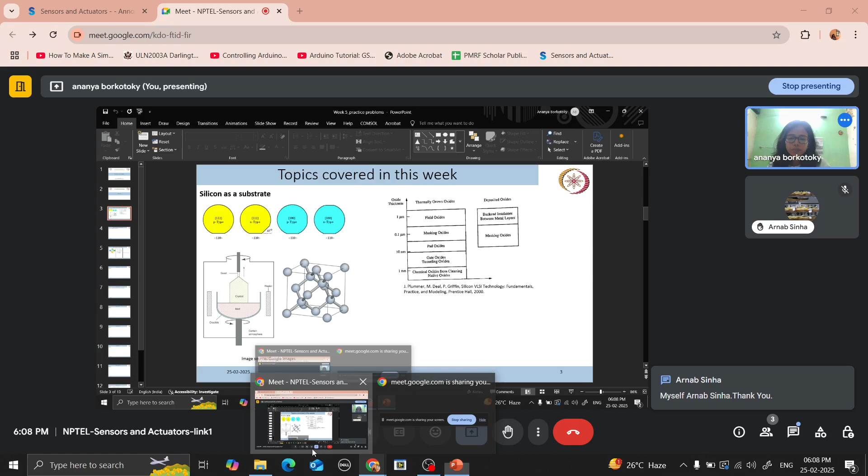The first topic discussed this week is about silicon and silicon as a substrate. In this course we are mostly talking about different sensors which are MEMS based, and many of these use silicon substrate.

We already know how to pattern silicon very easily, like what materials can be used for etching of silicon or silicon dioxide. So all these things are already well known.

Also, bulk micromachining and surface micromachining techniques on silicon substrate are well known. The processes have been developed, so it is easy to work with silicon substrate, and that is why we are mostly focusing on silicon. But for some specific applications, there may be a requirement for other substrates as well.

Suppose you know silicon is not transparent. If you want to use a transparent substrate, then glass can be an option. And if you want some flexible substrate, then PDMS or any other flexible substrate can be an option.

That depends on the application and the type of sensor that you are designing, so we will talk about silicon here. Now you know there are different types of silicon substrates available for us: 111 p-type silicon, 111 n-type silicon, 100 p-type silicon, and 100 n-type silicon.

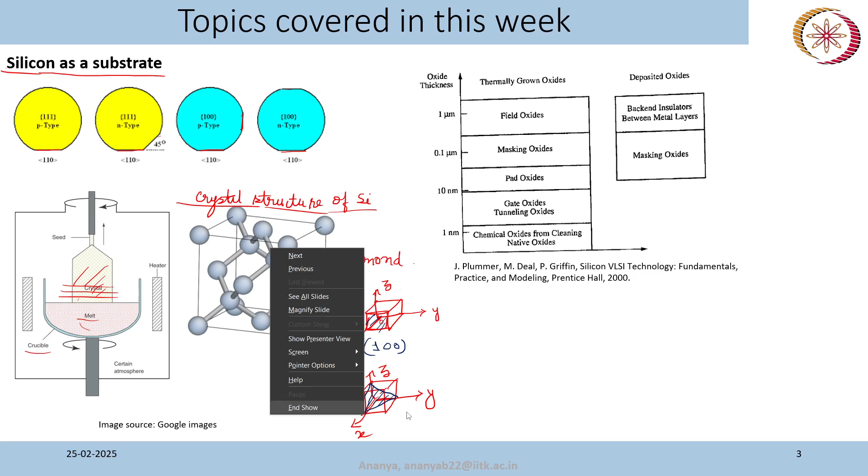Okay, so my diagram is not very clear, but you can see that this is our 111 plane. This plane cuts the x-axis at 100, y-axis at 010, and z-axis at 001. That is why this is the 111 plane.

Now if you look at the silicon crystal structure, this is the 100 plane, and the 111 plane will be this. You can see that the atomic density in these planes is different.

That is why if you have a 100 silicon wafer, it will be less reactive to some surface phenomenon. It will be less responsive in a surface phenomenon compared to 111 silicon, because of the more atomic density for surface reaction, the reactivity will be more.

So based on that, you can determine what kind of silicon wafer you want to use for your application. If it involves some surface phenomenon and you want this surface activity to happen, then you'll probably go for the 111 silicon wafer. And mostly in CMOS devices, the 100 silicon wafer is preferred.

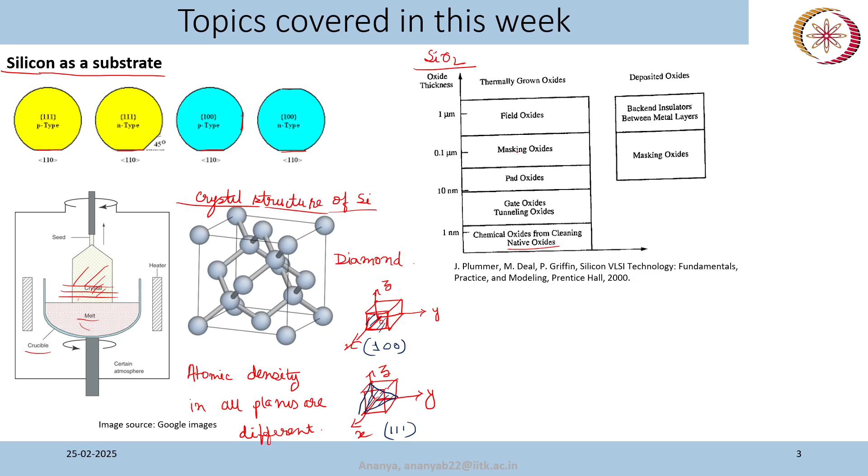Masking is like, say you are doing bulk micromachining of silicon. So this is your silicon, and you have patterned your SiO2 like this, and you are using it as a mask here. Now you can do micromachining here, or if you have a silicon wafer and you have made an opening like this using SiO2, then you can go for doping here. Basically it is used as a mask, like a covering for the silicon below it.

Okay, so we often use silicon dioxide for this purpose, and we call it a pad oxide because silicon dioxide is amorphous in nature. So many times, instead of getting strain and stress from any other processes, we use an SiO2 layer as a pad oxide, so that no stress and strain is created because of any kind of harsh treatment. And if it is very thick, then it is a field oxide.

You must have studied about field oxide if you are from an electronics and communication background, maybe in any CMOS courses. So you can see that SiO2 has many applications, and in this course we have already discussed how we can use SiO2 as a kind of masking layer.

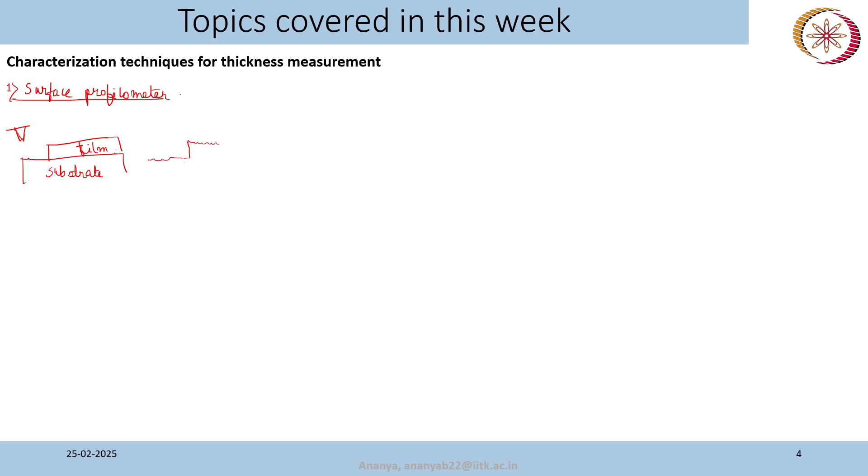At this point it will see a certain reference thickness, then there will be a jump here, and there will be some other thickness. The surface may not be very smooth, even if the roughness is in nanometer scale. If you use a very good system, it will pick up some of the surface roughness information as well.

From this result, you can take a reference here and the average value of this reference will be your thickness of the film.

What we normally do for measurement is not make just one step, but multiple steps. If I give you the top view of your film, there will be multiple steps, like this.

Now, how can you make this kind of step? Whatever deposition technique you are using will give you a uniform thickness, right? But you can put some tape or something similar to cover this area, and later remove the tape to make this kind of a step.

The good idea is to do lithography to make the step. There will be a photoresist, and then you can remove the photoresist instead of a tape, which gives a very good interface; otherwise it will be very noisy data.

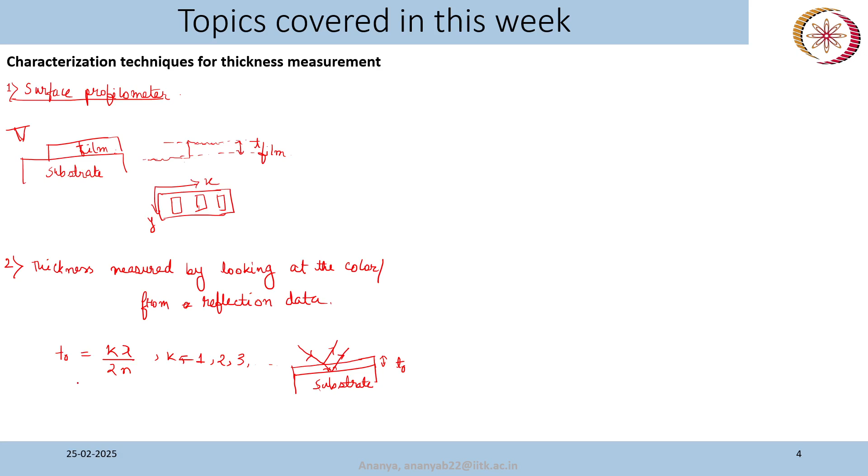Now the condition for constructive interference is: T naught is equal to k lambda by twice n, where k can be 1, 2, 3 — this is like the order. This equation was given in the class and discussed also. So this is the condition to have constructive interference.

And this condition is when the incident angle is 0 degree. So if I consider this incident angle as theta, if it is 0 degree, then this is the condition for constructive interference.

Okay, now you can directly use this equation to calculate what is the thickness of your thin film. Now practically how we will do this: if you have reflection data of a thin film...

There will be certain reflection maxima and certain reflection minima. So this is one reflection maxima and this is another reflection maxima, say at lambda 1 and lambda 2. You can see what this condition is. So suppose this is for k1 and this is for k2, so k2 minus k1 is equal to 1.

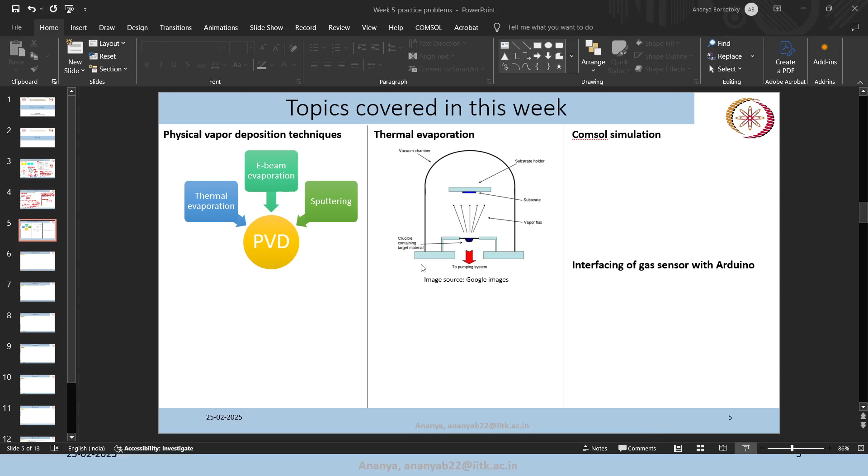So if there is any question you can ask. I'm taking a pause. Next I will go to the questions.

So, I'm asking the two of you, are you working on designing a sensor? In what area are you working? Like simulation of a sensor, or actually making a sensor, or working on interfacing a sensor with some circuit, or maybe you are taking this course just because you are working in fabrication.

Gas sensors, yeah, I did work on gas sensors in my masters. That was my MTech thesis. I also worked on fabrication of a sensor for sulfur dioxide sensing. Okay, thank you. Okay, I'll go to the questions now.

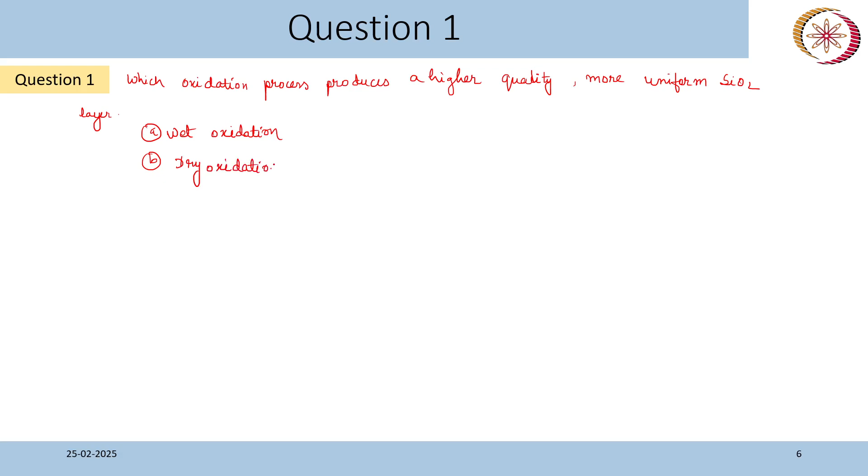So you can tell me the answer. And you can also think about why a certain technique gives us higher quality and a more uniform layer compared to other techniques. The comparison between different techniques is also important. As I've mentioned many times, there are often certain trade-offs. One thing will be good in one process, and another thing will be good in another process.

Someone is on unmute.

Thermal, the option is thermal evaporation. But we don't go for thermal evaporation of SiO2. Thermal, like any other process, involves high temperature.

So we normally grow the SiO2 layer. There are two terms: growth and deposition. Deposition is when we have a target material and a substrate, so evaporation is a deposition technique. Wet oxidation or dry oxidation is basically growth. We use the silicon substrate and grow SiO2 on top of it, so a certain portion of silicon is also consumed during the growth.

So we mostly grow SiO2 on silicon. We can deposit SiO2 using sputtering or PECVD or other deposition techniques. But on silicon we normally go for oxidation, either dry or wet oxidation. Now among these two, which one gives us a higher quality and more uniform SiO2 layer? That is the question.

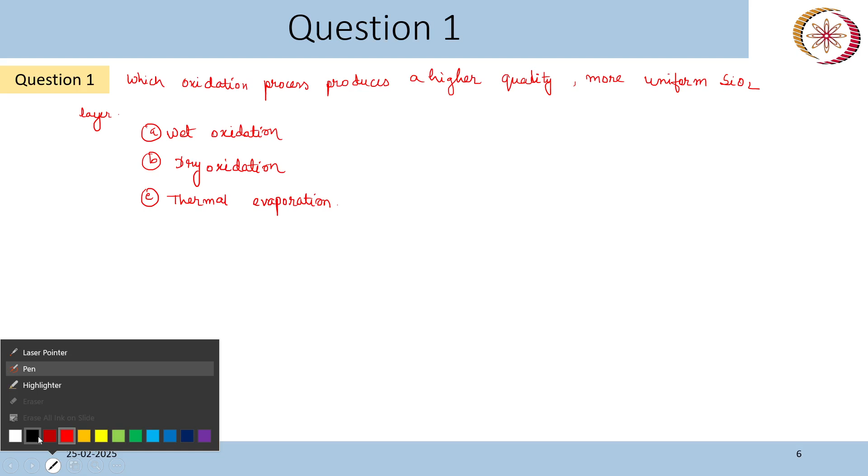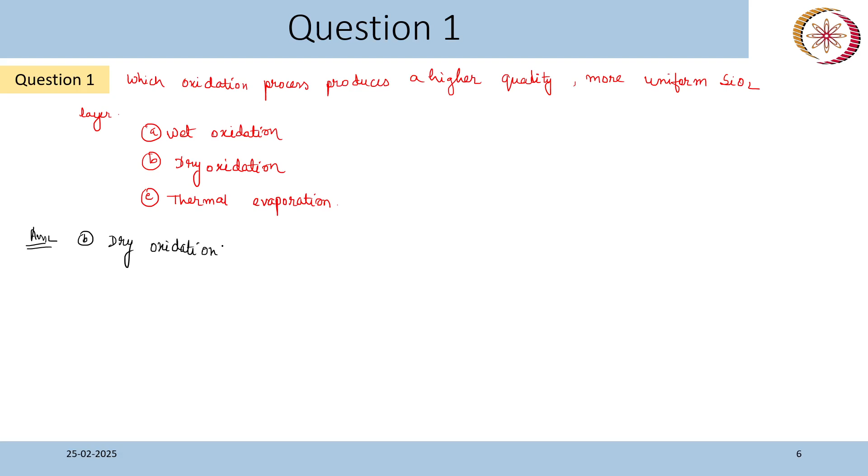So what happens in SiO2 growth, not deposition? You start with a silicon wafer, then elevate it and do the oxidation process at high temperature. The oxidation process will also depend on the temperature. You can either go for wet oxidation or dry oxidation. Wet oxidation means using water vapor, so there is also oxidant or oxygen that will react with silicon and form SiO2. Dry oxidation directly uses oxygen gas.

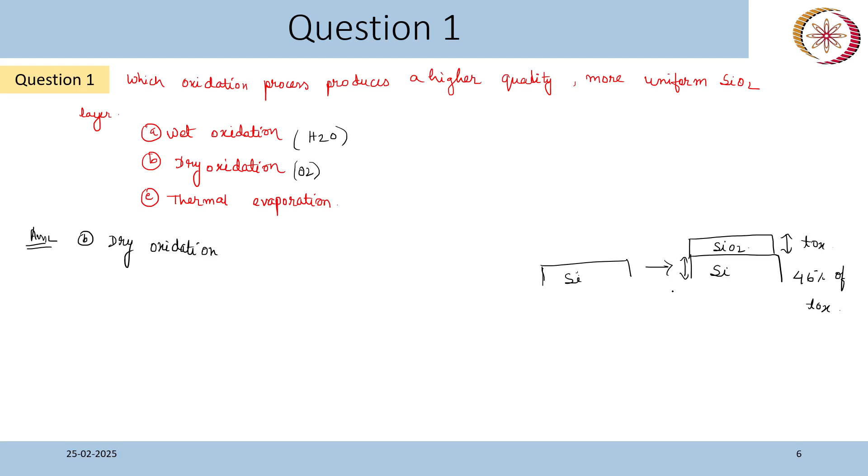So this is the difference between growth and deposition, just wanted to discuss that. In deposition, a material is deposited on silicon and there is no change to the substrate.

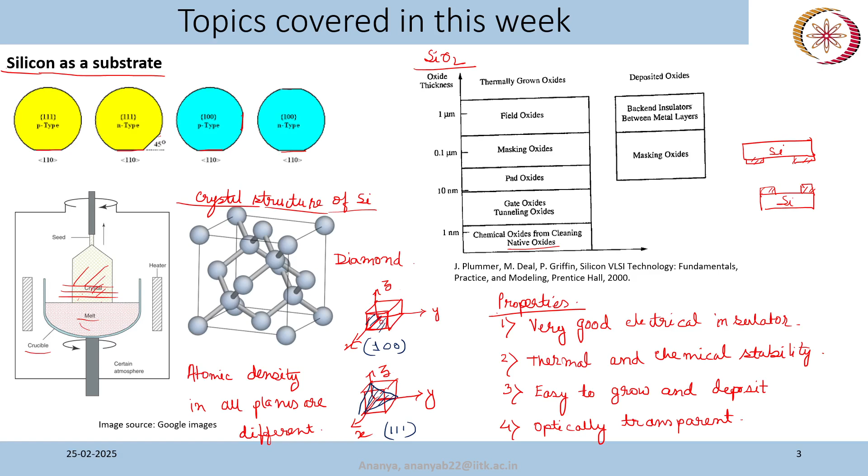Dry oxidation is often used to make good quality silicon dioxide, as I have shown. The applications of SiO2 differ. Say you want to grow a gate oxide, part of your MOSFET device, then you want very high quality oxide, so you go for dry oxidation. Dry oxidation gives less defects and a more uniform SiO2 layer, but it is much slower than wet oxidation.

Dry oxidation produces a thinner but higher quality oxide with fewer defects, but the process is slower. So if you want to grow thick oxide, like masking oxide, we normally go for wet oxidation using water vapor.

If you are interested, I don't want to confuse you much, but how the oxidation process actually happens on silicon is an altogether different topic.

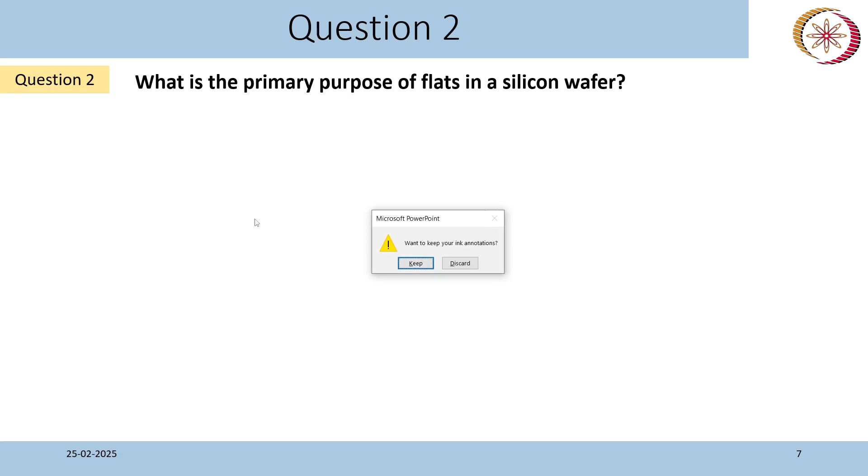You can frame the answer and write in the chat box. I will wait for 1 to 2 minutes. You can write what the primary flat indicates, what the secondary flat indicates, and what the respective positions of primary and secondary flats indicate.

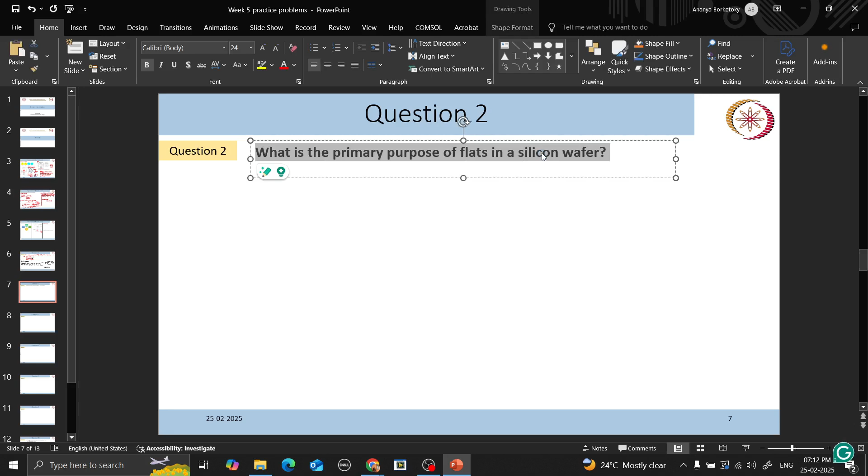I'll give you the question here also. If only one flat means 111 p type. Yeah, that is correct.

So it will help us to find the type of semiconductor, it will help us to find the doping type in our silicon wafer — that will be more appropriate. So whether it is N type or P type, and also what is the orientation of the wafer, whether it is 100 or 111. That is the main purpose of using flats on wafers.

If you are interested, nowadays many wafers actually have no flat, so they use a notch on the wafer, to save space and all. But most of the wafers that I have seen, like those we use in our lab, have flats. For bigger wafers used in industries, instead of a flat, a small notch will be there that indicates the orientation and type of the wafer. But as of now, we will stick to these flats for orientation and doping information.

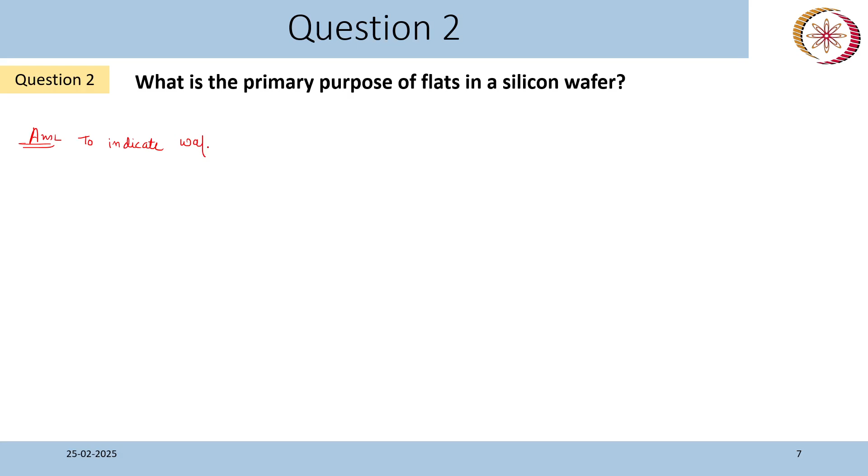I'll write the answer, so I will upload this, that is why: to indicate wafer orientation, 100 or 111, and doping type.

The primary flat is the longer one, and it helps in identifying wafer orientation.

You know that this primary flat is along the 110 direction, so based on that we can determine whether it is a 100 or 111 wafer. And the secondary flat provides the doping information.

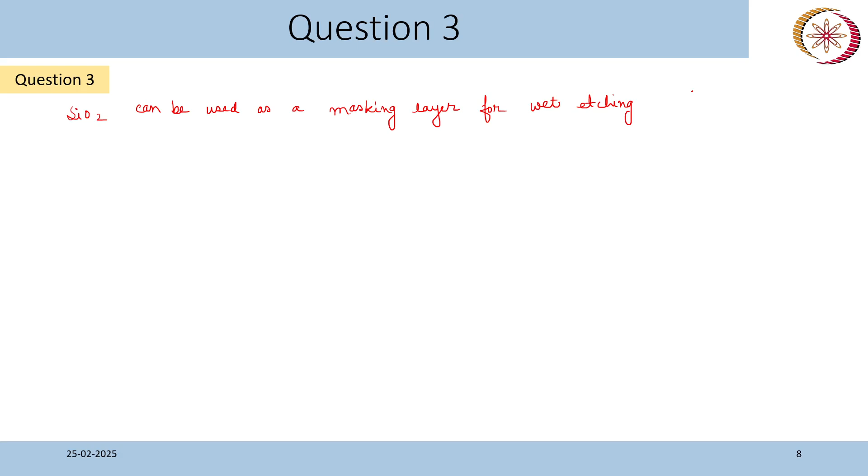Okay, let's go to the next question. This is a true or false question. The question is: SiO2 can be used as a masking layer for wet etching processes involving KOH. Whether it is true or false — it's a very simple answer. I think all of you can answer me in the chat box, and also tell me the reason why you think this is true or false.

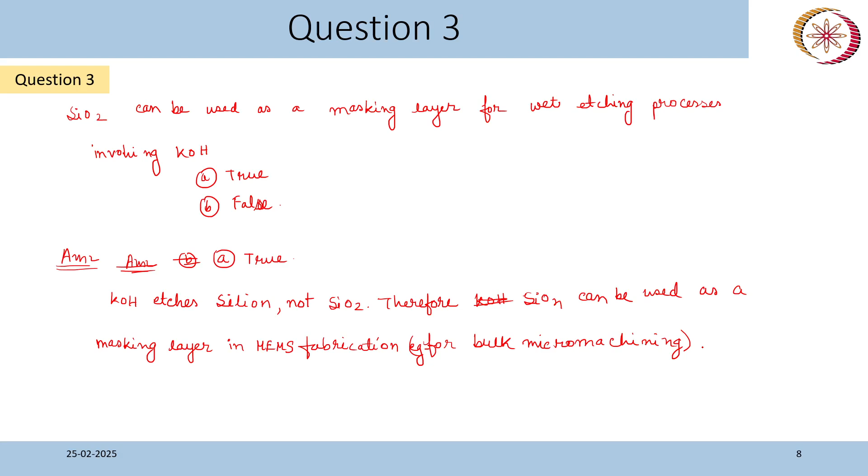So shadow mask, see, it depends. I cannot give you a definite answer. It depends on where you are doing your project and what sort of facilities are available nearby. So I know that this process can be done in our institute, but I am not sure if people from outside our institute can avail the facility or not.

So maybe you can ask in your nearby institute if it is not available in your institute. For mask and pattern, if you want a shadow mask, then definitely some material that can sustain a bit of higher temperature. It depends on what material you are depositing, what is your material that you want to go for deposition, because the deposition condition will determine what kind of mask you should use as a shadow mask. Your mask should not be damaged during the deposition technique. I think that is the only criteria.

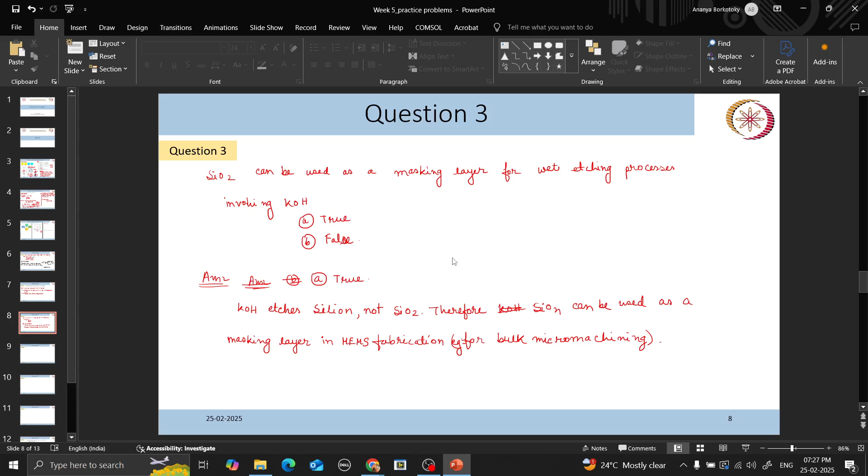Okay, I'll write down the next question. Why is color based thickness measurement of SiO2 less accurate than ellipsometry? If we want to know the exact thickness, then we go for ellipsometry rather than color based thickness measurement. What is the reason?

Option A: colors can be affected by viewing angles. Option B: there can be human error. Option C: color chart only provides approximate thickness. Last option: all of the above.

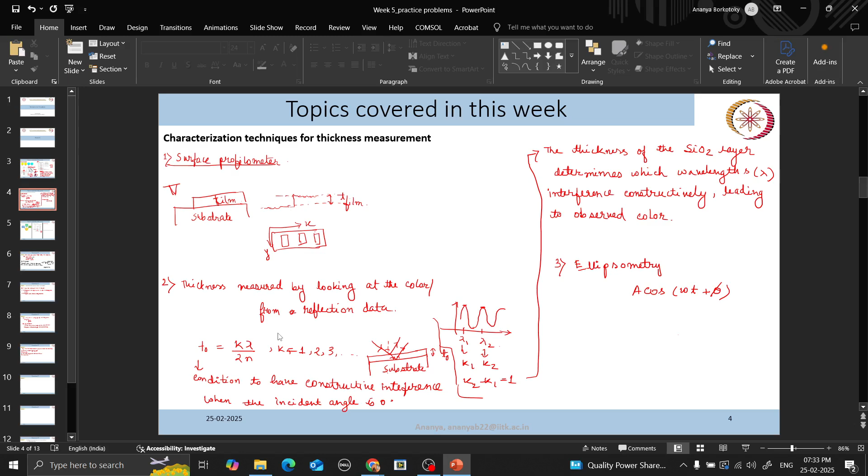Colors can be affected by viewing angle as well. If you remember the equation I mentioned earlier, discussed in class, this is the condition for constructive interference when the incident angle is 0 degree. If the angle theta or phi is not 0 degree, then there will be another term, cos theta or cos phi, depending on what variable you use to denote the incident angle. That term will change your calculation a bit. So it is important to know the viewing angle, and it's not easy to measure or estimate when relying only on your eyes, not on an instrument.

That is why for accurate measurement we go for ellipsometry, which is a non-destructive technique. We can also go for a surface profilometer if we have a step in our film. This is not exactly destructive, but it's not anymore a thin film since there is a step, so we call it a destructive technique. But the most accurate will be ellipsometry, a non-destructive technique.

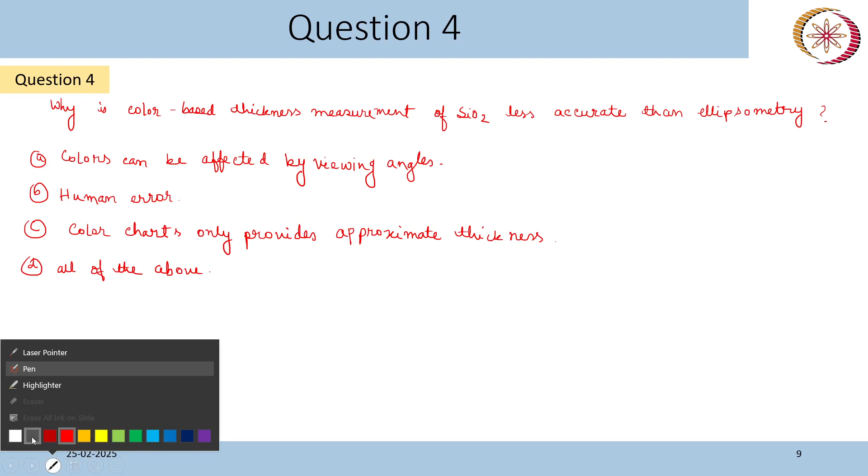But people still use this color-based thickness measurement because it's quick and doesn't need any instrument, and based on expertise, the thickness can be pretty close to the actual thickness. But for that, you have to work a lot with silicon and silicon dioxide wafers to accurately tell the thickness just by looking at the color.

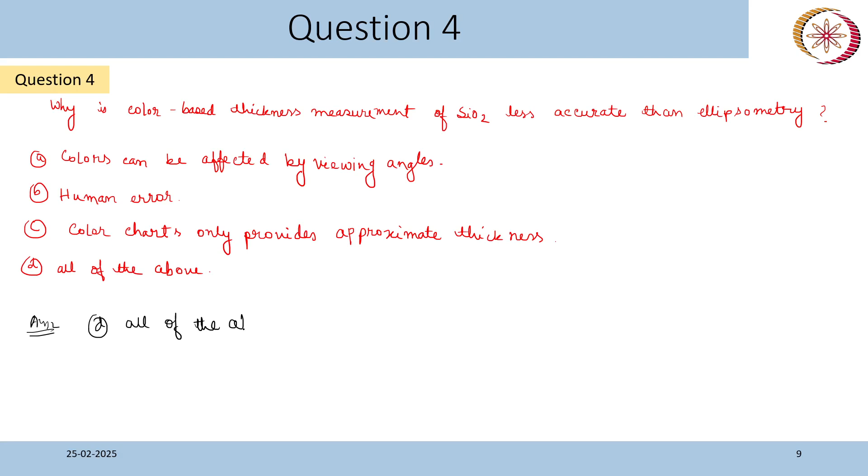This is for SiO2. If we have other thin film materials, we don't have this kind of color based thickness measurement option, so we go for ellipsometry, surface profilometer, or any other thickness measurement technique.

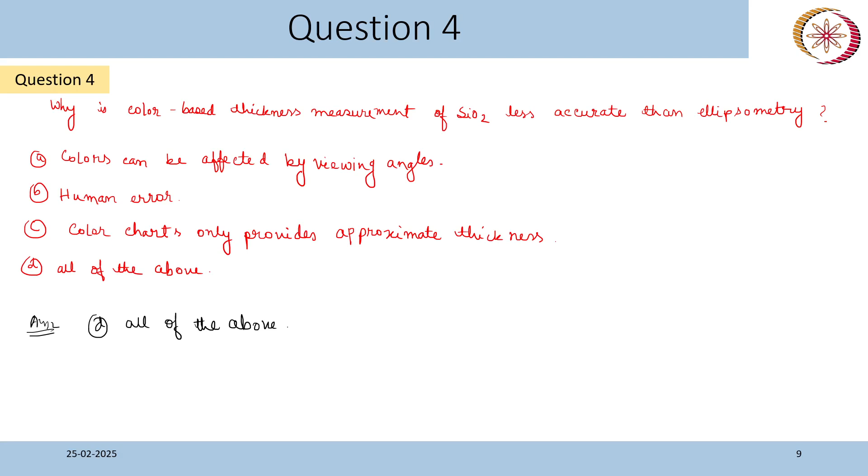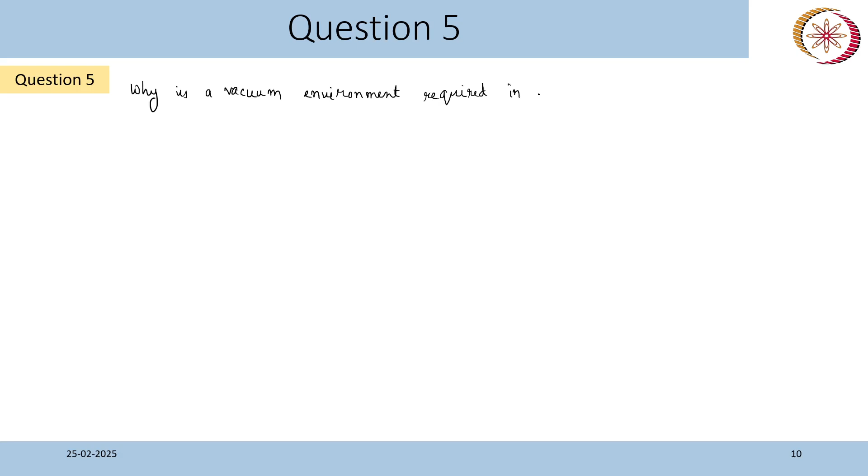Okay, let's go to the next question. Why is a vacuum environment required in thermal evaporation?

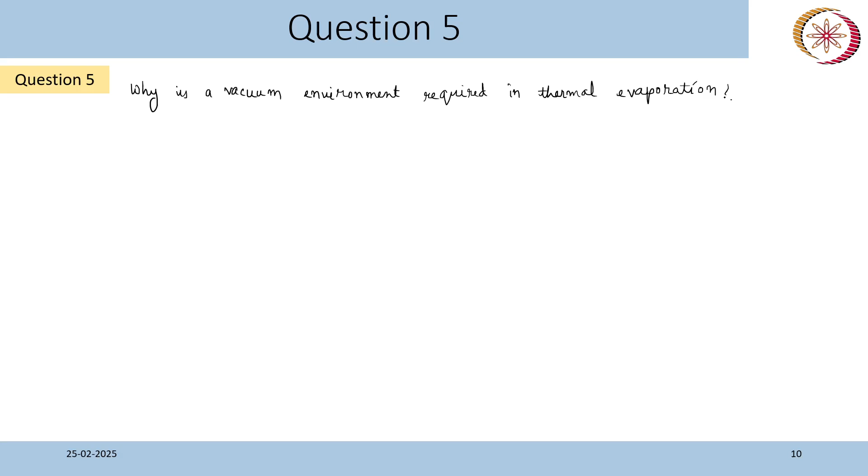Option A is to prevent oxidation of the target material.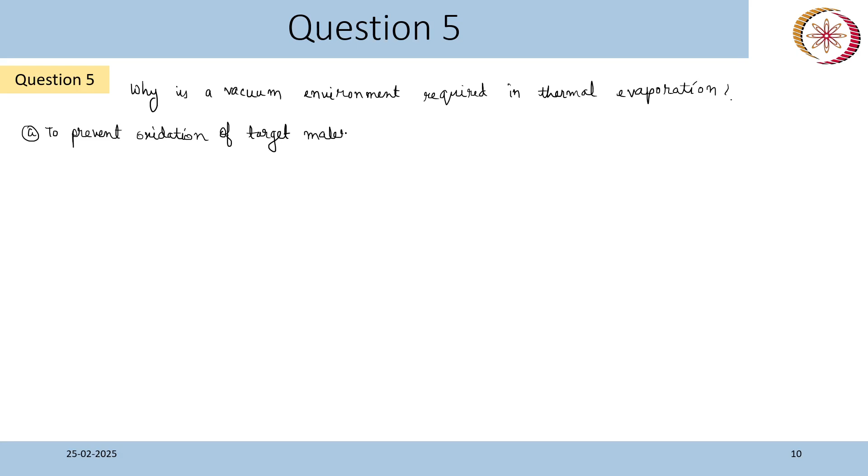Option B is to allow precise control of thickness.

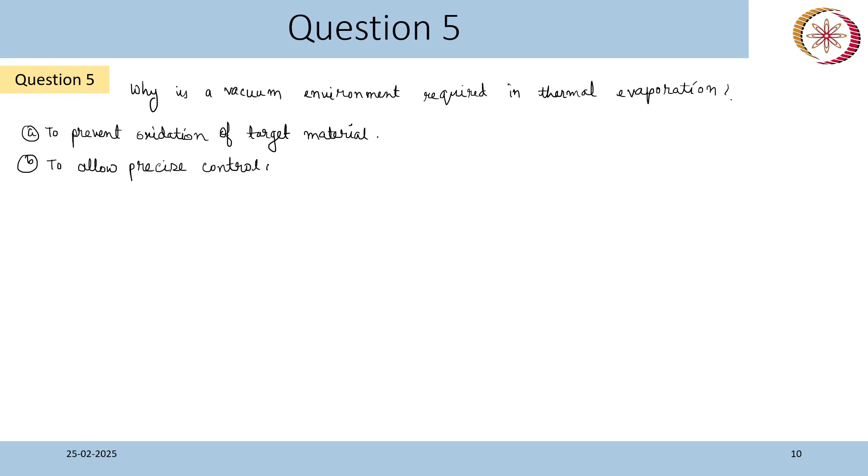Option C is to minimize collisions between vapor atoms and other molecules present. Option D is all of the above.

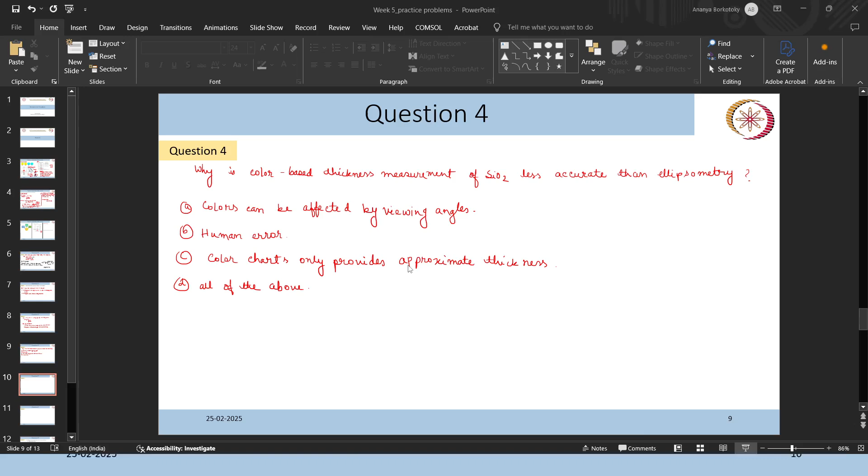You can tell me the answer.

Option D is the correct answer. But why do you think that option D is correct? All of you have given the correct answer. The answer is all of the above.

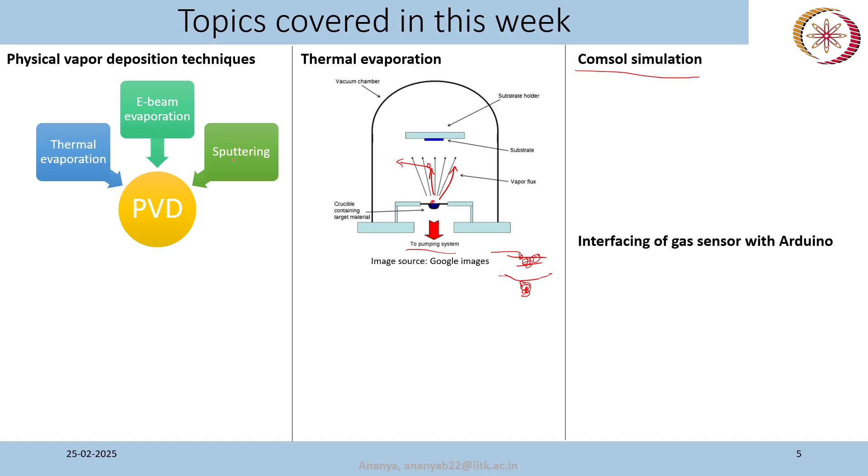That is why vacuum environment is important in thermal evaporation as well as in e-beam evaporation. Sputtering is a bit different, as I discussed earlier. There also we create vacuum so there is no contamination, but during sputtering we don't maintain that high vacuum. This vacuum requirement is process dependent. For thermal evaporation we want a very good vacuum so that our evaporated material goes directly from the target and sits on the substrate, not somewhere else.

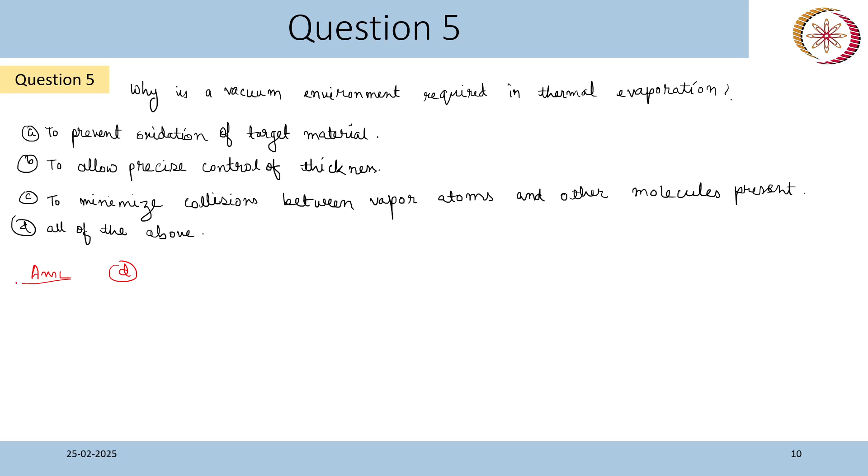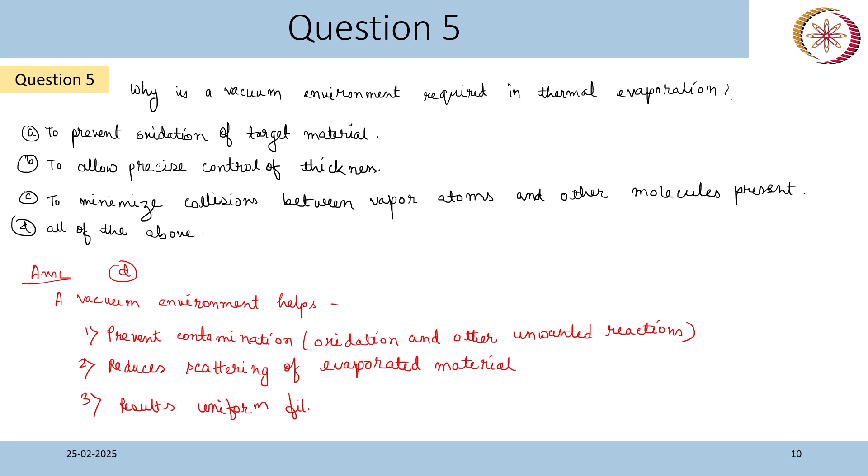So I'll write a few points here: it reduces scattering, and because of these two things, we get improved film quality and good, uniform thickness.

Let's go to the next question. There were a few lab classes or tutorial classes on COMSOL, so I have included a few small questions on COMSOL Multiphysics. I am not sure how many of you are using or have used COMSOL, but based on the videos given for this week, you will be able to answer this question.

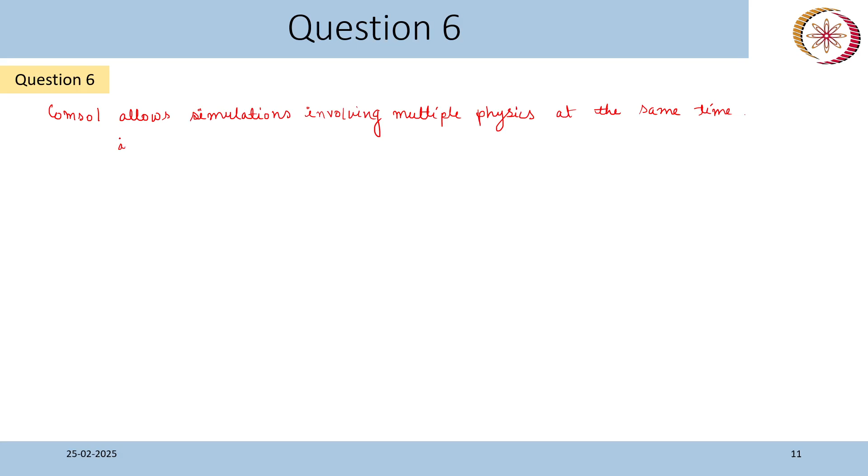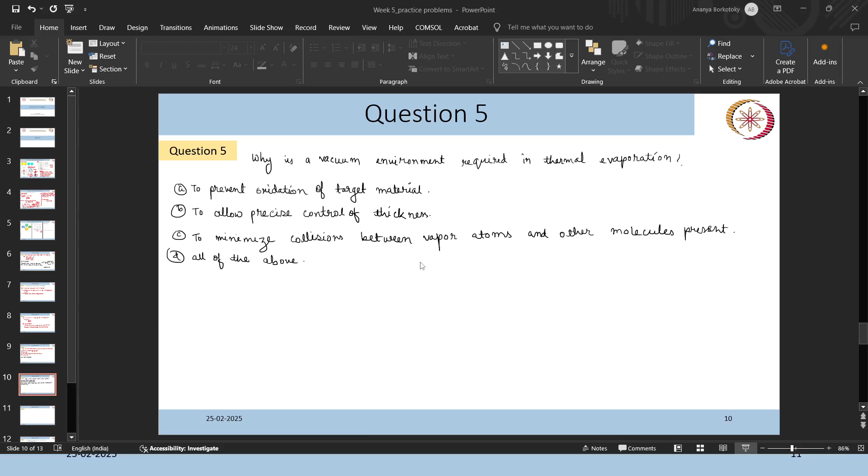COMSOL allows simulations involving multiple physics at the same time. Is this statement true or false? You can tell me the answer, and also let me know if you have used COMSOL or any similar software for your work.

It's true, and you will be using it next month. I hope that means you have access to COMSOL. It's a good tool, many people use it, and lots of resources are available, like YouTube videos. COMSOL often organizes webinars you can attend if needed. I have attended a few earlier, and those webinars are available on their website, I believe. So you will be able to get help, and because it's a very well known and well used software, getting help from fellow users is possible.

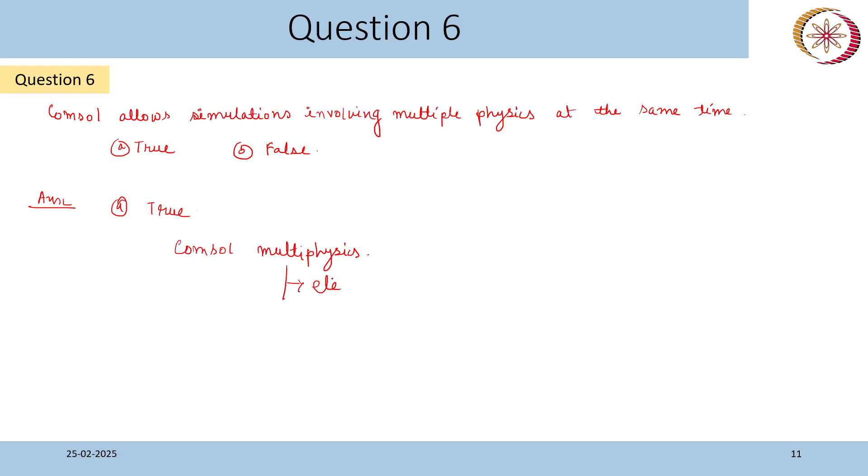Different physics modules are available, so you can work on different things. I can give you a few examples: electromagnetics, wave optics, fluid flow analysis, heat transfer, and chemical reaction modules, which are useful for sensor design.

Mass transport - these are useful for different types of sensor design. If you have the access, you can look and try a few sensor designs by yourself. Many examples are already given in the application library. You can go through those for better understanding.

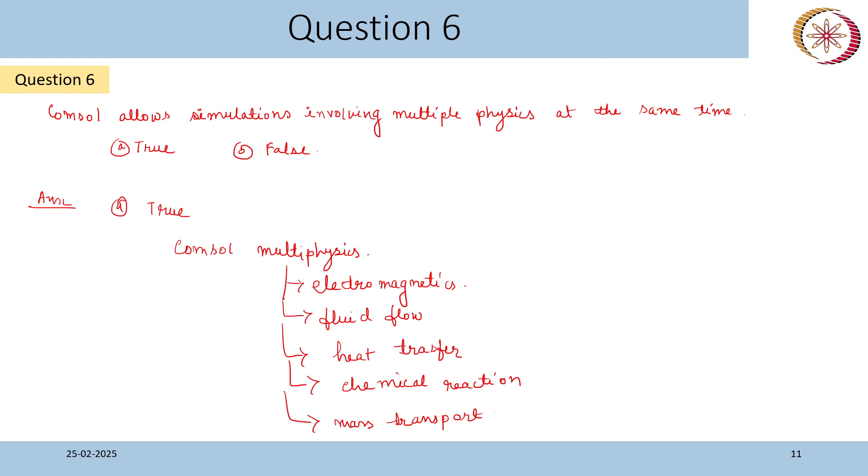Let me see if I have time. We have some more time, so I will give you this question. Another video, on the lab class, was on interfacing gas sensor with Arduino. We already discussed how we can interface a sensor with Arduino.

This question is on the sensor used in that class, the MQ3 gas sensor. The sensor is used to detect a particular gas - what kind of analyte or gas does it detect? Is it carbon dioxide, alcohol, hydrogen, or ammonia? You can tell me the answer in the chat box. Also mention a few other details about this MQ3 gas sensor, like what is the working mechanism, what kind of sensing material is used. If you've watched the videos, you must remember these details. Tell me in the chat box, recall and let me know.

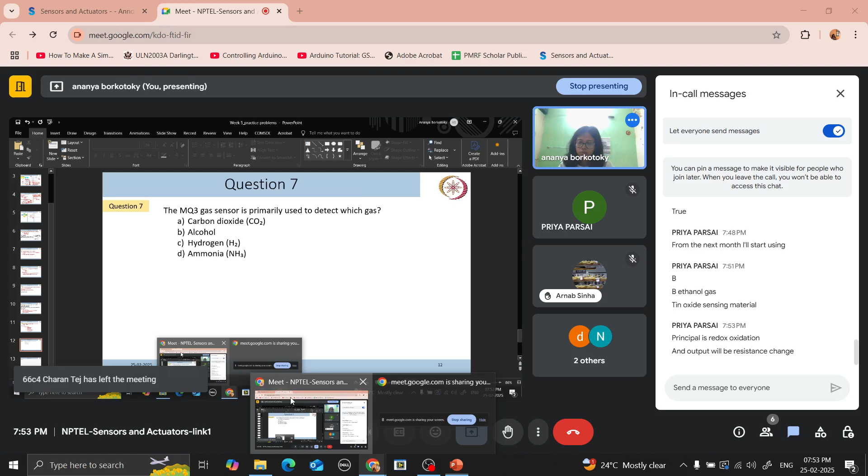It's B, it's an ethanol gas sensor, and tin oxide is used here. The principle is redox reaction and the output will be resistance change. That's a good answer. So the sensing material is tin oxide, so it is a MOS gas sensor, metal oxide semiconductor gas sensor.

So what can be other MOS sensors? It can be based on ZnO. There are a few other materials as well, and the principle is redox reaction, the oxidation reduction reaction - that is the working mechanism, and the output is resistance change.

So what type of output does it have? The MQ3 sensor has two types of output, right? If you remember from the class, the main output is analog in nature - a change in resistance - as well as one digital output, if we use it as a comparator. A potentiometer was connected, and if the gas concentration is higher than a certain level, we can compare the sensor output with the gas concentration and set a limiter value, so that if concentration is higher than this, the digital output pin will be high or low.